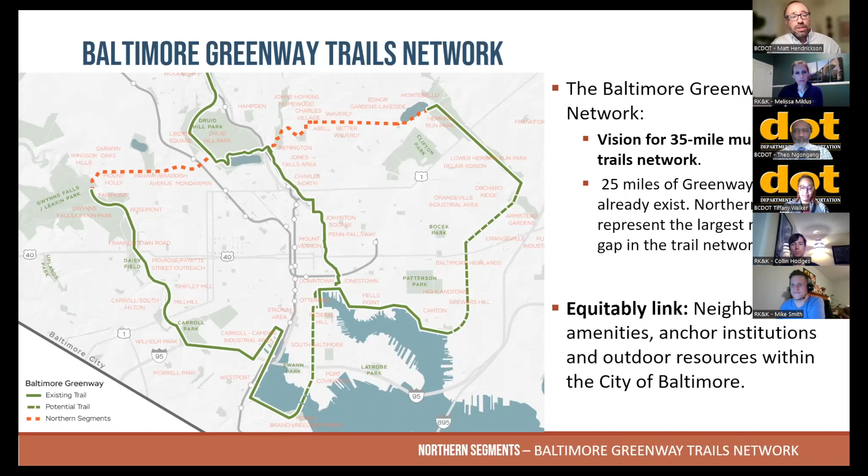So what exactly is a greenway? I think there's just a different feel and type, but if you have experienced any of our trails, whether on Gwynns Falls, Jones Falls, Herring Run, if you've walked around the Inner Harbor, you kind of get that sense of what it really is and what it isn't, right?

We know how important that green space is to folks here in the city. And so it really is kind of a gateway for communities, not just for accessing green space, but then there's the opportunity for us to connect to transit and other modes of transportation, opportunities for other investments and amenities, whether it's benches or playgrounds, or I know that a lot of our parks have ping pong tables. We're kind of activating that with these different amenities.

And again, it really is kind of complementing the neighborhood, a true community asset, as well as all the things that we're trying to do as a city, as far as ADA accessibility, connectivity, access to jobs, and just a cool way to see the city of Baltimore.

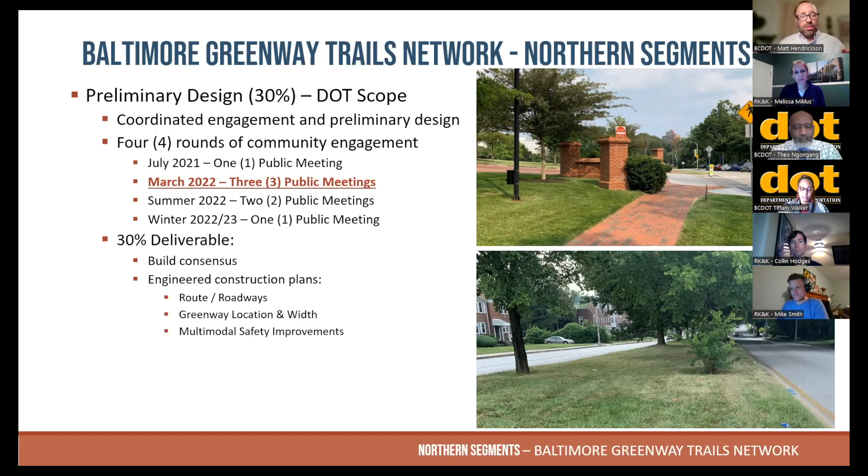So we're going to continue to work on that, you can see the outline there. After this 30% design, we'll go through another design phase to get into more detail around the environmental reviews, the engineering, and further study intersection treatments and signal analysis. That is where we will be for our next steps.

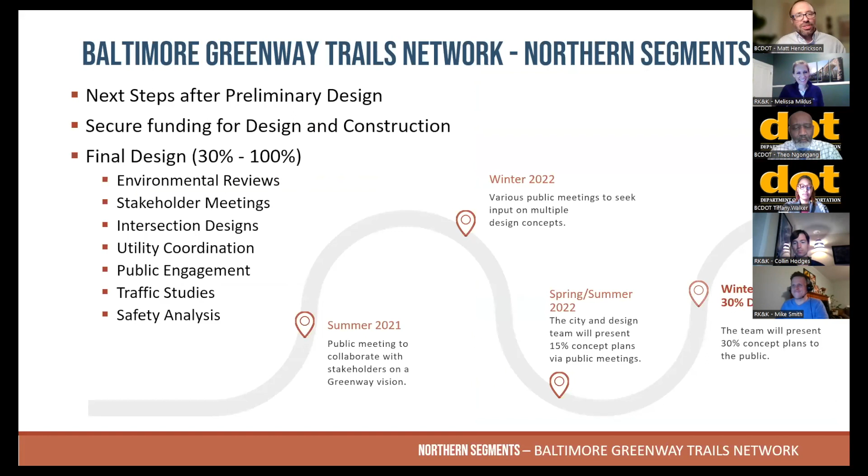So I think I droned on a little bit longer there. Not quite as I should have practiced the last 2 nights. I don't know what happened there. But what else do we have? All right, I am done.

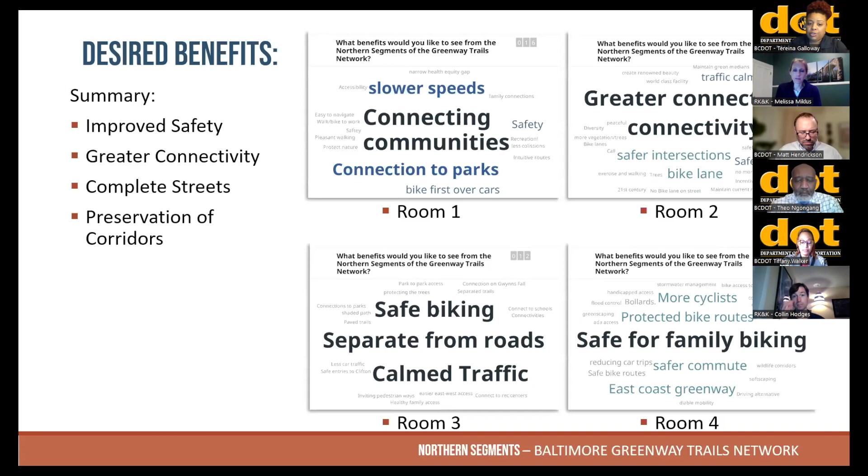We asked the community members that participated about the desired benefits of the trail system, and these are a few of the things that folks commonly said they were interested in. For those on the phone, those things included improved safety, greater connectivity, complete streets, and the preservation of corridors.

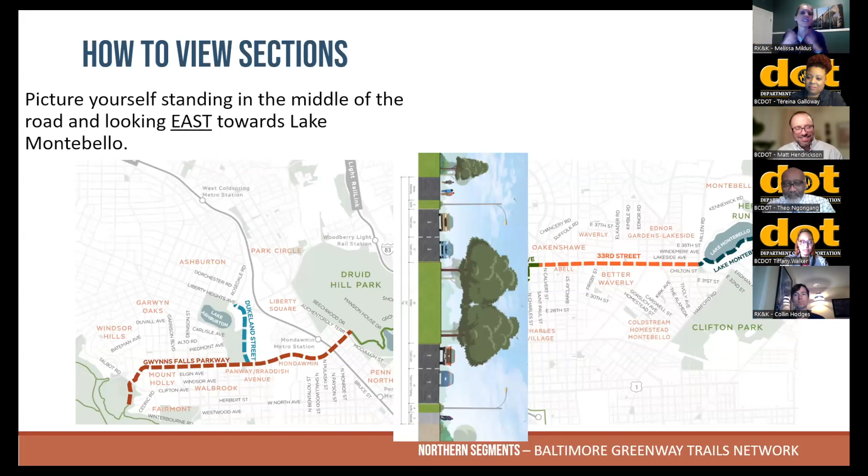Okay, so let's jump into this segment and take a look. In a moment I'm going to bring up a story map, which you can all click on later to scroll through these options. If you didn't join us the past two nights, those options are on there as well, and there are a couple questions about the past two nights on the story map.

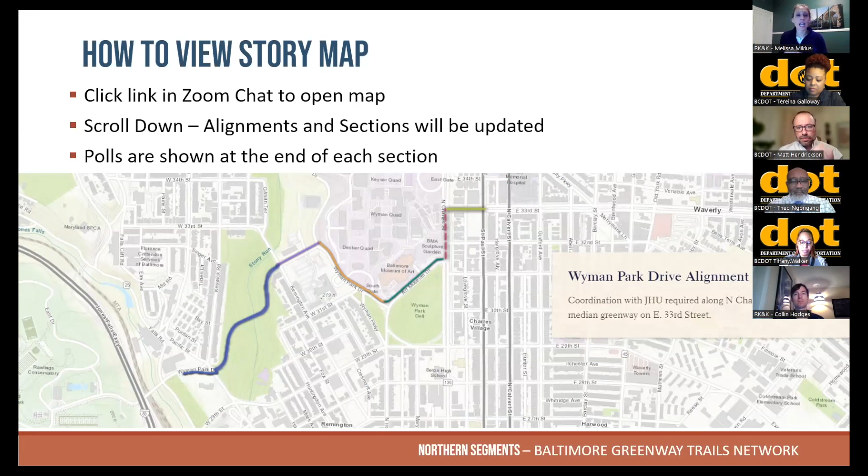Before we go into the breakout rooms, Mike is going to copy and paste that story map link in the chat. But right now I'm just going to get you guys acquainted with it if you haven't seen it before. It's pretty easy, it's just like going to a website. I'm just opening my browser, and you can click on the link or copy and paste it from the chat. Tonight we're talking about the Wyman Park Drive section.

If you click on the link, you'll see the welcome screen here. At the top, I can click through these quick buttons, and it'll take me to the section we're addressing. I'm going to click on Wyman Park Drive because that's our area for tonight, and show you how this works. This is kind of neat.

You can actually click and drag and move your map around, and you can also zoom in and out. So you'll have a plus and minus on your screen as well. You can get as close in as you want to read all the little names of the roadways, or you can zoom way out and see all the sections of your greenway. As we scroll down with our mouse, or as you track down, you'll see different components pop up.

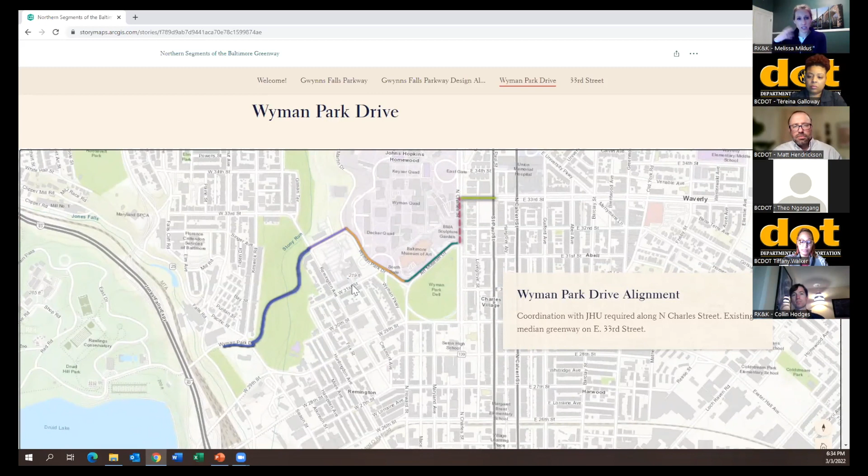So I'll show you how that works for the Wyman Park Drive section. When you go into your breakout rooms and your facilitators are sharing their screen, they'll be scrolling down just like this, or you can do this at your own pace.

We will start tonight with the section of Wyman Park Drive that goes through Wyman Park, taking us from about Sisson to Remington. As you scroll down, these cross sections are going to pop up on the side of your screen, and you simply click one time and it opens up the image for you. So we're looking at this roadway that goes through the park here.

One of the potential design solutions for this roadway is taking that narrow asphalt greenway that cuts through there right now and widening it. In this first option, we widen it away from the roadway, so the roadway remains the same and that path gets a little bit wider. That's our option 1.

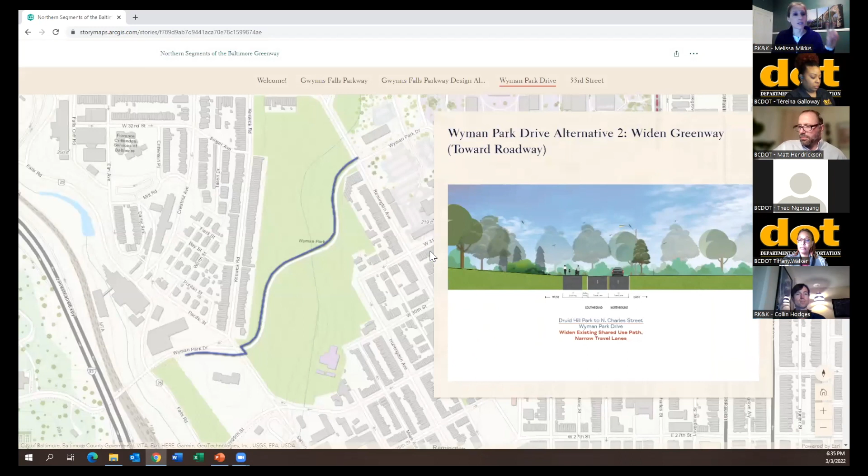As I scroll down, you'll see there is a second option for this section of roadway. What that looks like is we take that shared use path and widen it toward the roadway. In order to have a bit of a buffer between our greenway trail and the roadway, we narrow the roadway a little bit, so we still have a travel lane in either direction, it just gets a bit skinnier. That's option 2.

As I scroll down, you'll get to option 3, which is a little bit different. Again, we're widening that greenway toward the roadway, but in this case we take the roadway to one lane in one direction. Which direction, I don't know yet, because we have to study it and figure out which way makes sense. But the cool thing is that gives us space to add more significant vegetation and a buffer between the trail and the roadway. So you'll have that wide greenway trail, a buffer that hopefully we can put trees in because it'll be nice and wide, and cars moving in one direction. Like I said, I'm not sure which one, we still have to study that, but it's just an idea to get that wide path and some more trees.

As you scroll down later, or as your facilitator scrolls down in your discussions, you'll see a survey. We're not going to answer it right now, I'm going to continue on to the next design solution, but you guys can do that at your own pace, or when we get into the bigger room you can answer that in the Slido with us when we come back. Feel free to discuss first and then come back and answer the questions.

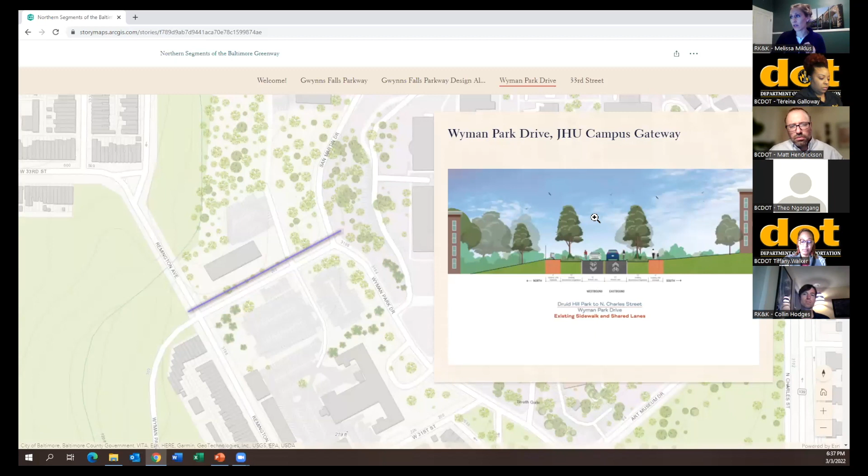The second segment we're looking at is Wyman Park Drive, which pops through the Hopkins Gateway right there. If you guys have been through there lately, it's actually kind of lovely, relatively new, with new brick sidewalks. There are bioretention facilities on either side of the roadway, which means stormwater is going into those facilities instead of into a closed pipe system underground.

This is relatively new, and probably the most different section of our potential greenway trail because it was just completed. At this point, when we have people walking, they'll walk on the sidewalks, and if we have people on bicycles, they'll be in a shared lane environment. This is the only section of our northern segment of trail that isn't just all trail, and it's just because it's new, it was just done. We thought for this little piece we could keep it that way because we have great places for walking and great places for biking. So no questions there, that one stays the same.

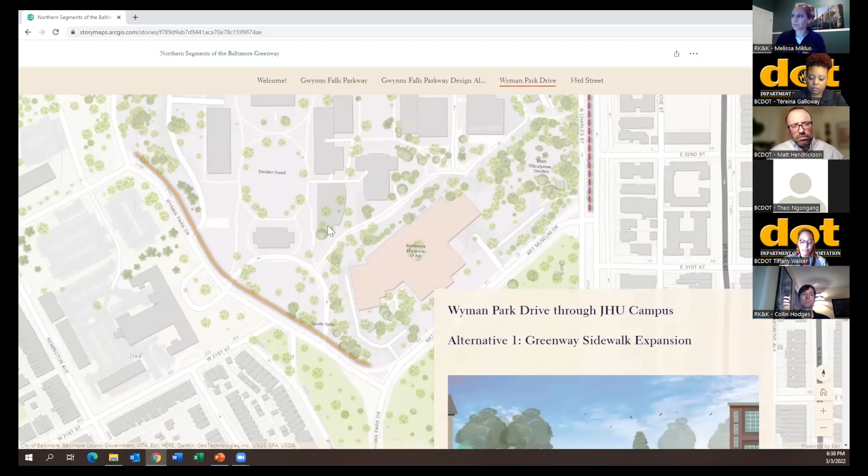So then as we turn the corner and head down Wyman Park Drive, we're kind of within Hopkins campus now, so it definitely has a historic feel to it. There are already existing brick sidewalks there, but since this is a greenway project, a trail project, not a bike lane project, we want to make sure we have that trail experience. We want people to be able to walk and bike in that space.

So here we're looking at a couple different options. The first one is potentially taking the brick sidewalk that is on the north side of the roadway and expanding that to be greenway width. So right now it's just sidewalk width, but we could take that, keep it brick, keep that character within the campus.

Our second option for this section—and we've cut through one piece, and I know the road transitions and changes a little bit, sometimes there's parking on one side, sometimes there's not—but in this particular slice, instead of expanding the sidewalk on the north side, we will have an additional greenway space there. In order to fit that, we've taken some of that parking space on the north side of the street and raised it up to sidewalk level, above street level at that curb height, making our greenway trail there.

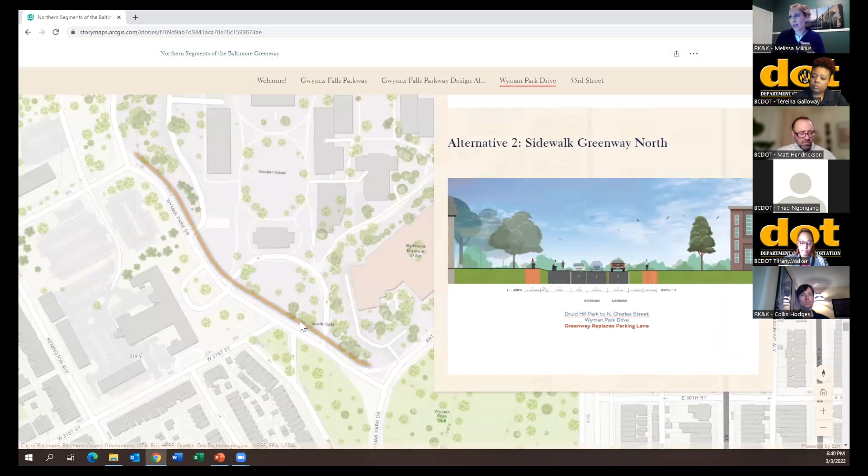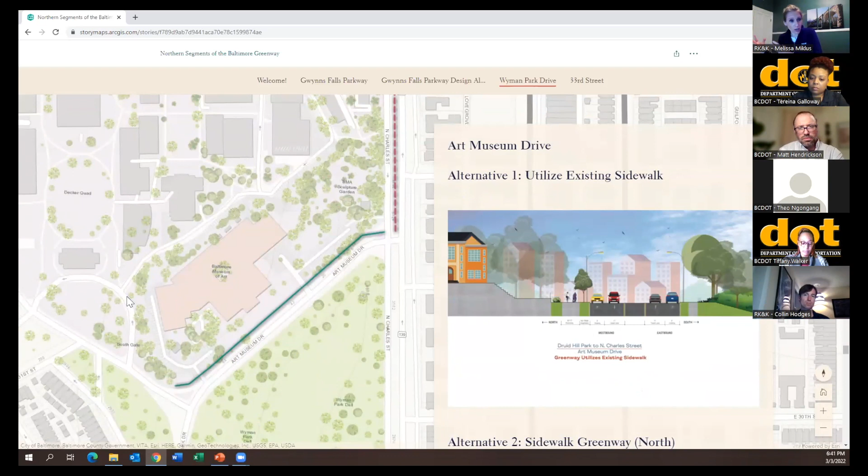All right, let's keep on cruising toward 33rd Street. We get to this section in front of the museum, so we're now on Art Museum Drive. As you all know, we have the museum on one side and a park on the other side of this roadway. Our first option here is to utilize the existing sidewalk. It varies a little bit, and there are some planting areas and some steps in front of the museum, but the first option is to really use that space and use that sidewalk as our trail.

As we keep cruising into alternate 2, the idea here would be to use some of that parking space that's in front of the museum. Again, we pop that up to sidewalk level, so we're completely separated from vehicles moving past. We'll use some of that parking space and then add our greenway there. So that's a pop-up — the first one was the existing sidewalk, and the second one is also on the north side, but using that parking space.

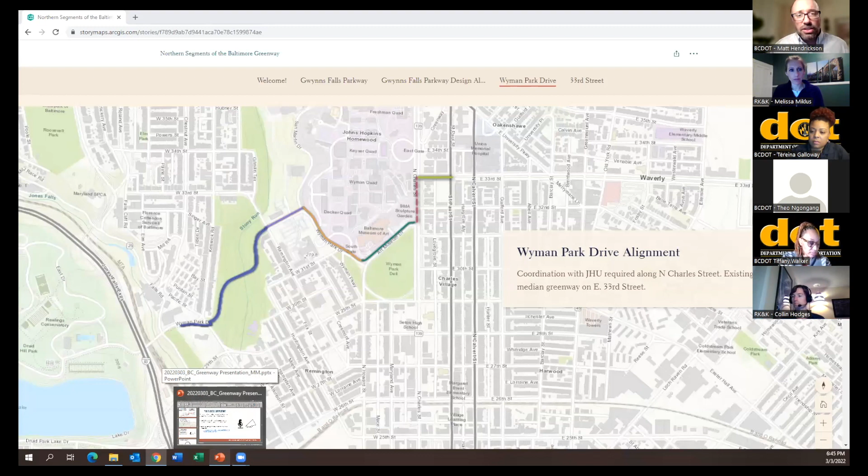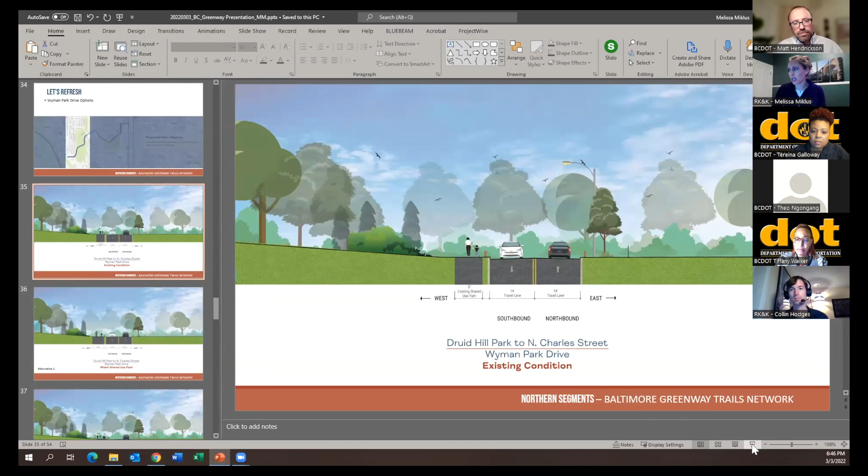Responding to some comments here - someone asked how to make this decision if they don't know what the roadway looks like today, having not been there. When we come back out after you've had some discussions, I have graphics showing what the before looks like. I'll go through the existing conditions so you know what that looks like before we go through the options, so you'll see those before making any decisions in the survey materials. And if we're not giving you enough time tonight, you can answer these questions on the website later, or send an email or leave a voicemail. There's plenty of opportunity to sit back and digest this before making a decision - it's not just tonight.

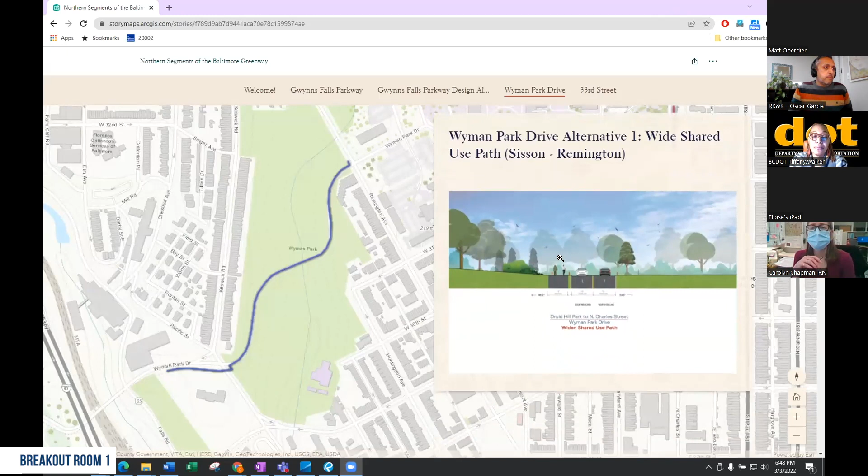For the Wyman Park Drive alternative, one option was expanding the greenway away from the road. Alternative 2 was expanding it towards the road, making the travel lanes narrower. Alternative 3 was taking out one of the travel lanes and expanding the greenway towards the road, providing a wider buffer. So that's for that section.

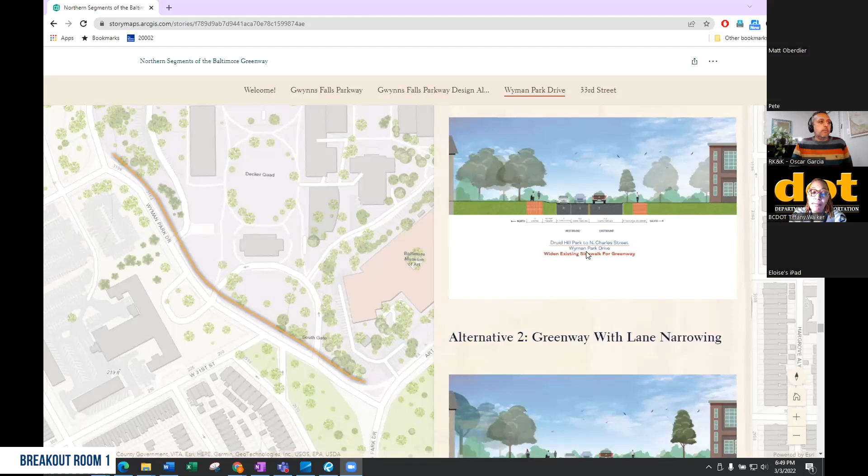For the other section toward the campus, there's the option of using the existing sidewalks, the second option of expanding the sidewalk, and another of expanding the greenway, taking some of the parking lanes. Finally, for Museum Drive, there's the option of utilizing the existing sidewalk, or replacing the parking lanes to accommodate the greenway.

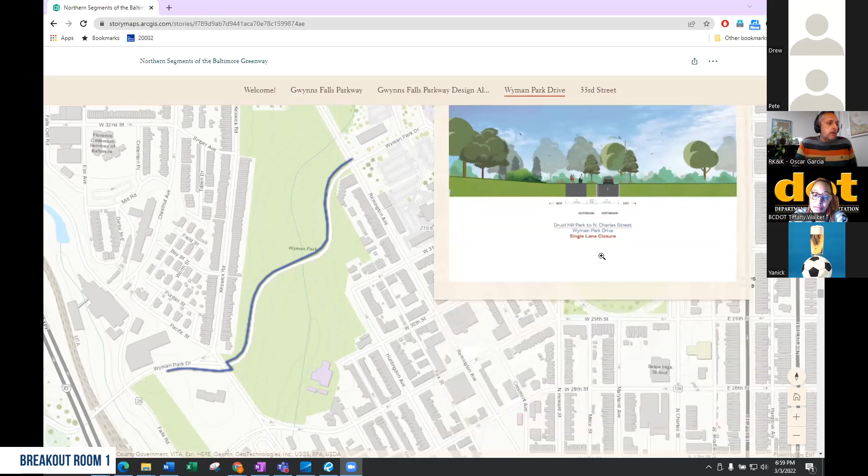Drew and Pete, anything else? I was going to ask, are we going to spend time looking specifically at the other sections, or are we just talking about Wyman Park Drive right now? Tonight's goal is to discuss this section, Wyman Park, the section across campus, and the section across Museum Drive. The other sections, as Melissa mentioned earlier, were covered in the previous meetings Tuesday and Wednesday. I was just referring to the other parts of tonight's meeting, just because the cross sections are so different.

Just generally, I wanted to comment on any of these alignments that are going to be narrowing road space. I ride daily on Art Museum Drive taking my kids to school, and cars fly on that street, and it's next to a park in front of an art museum. That sidewalk gets pretty crowded with people going to and from the museum, especially during events. So anything we can do to narrow that roadway and reallocate that space for the trail, rather than cramming everyone onto a sidewalk, would be my preference. Same for the street leading up to that as well - anything we can do to get it into the existing roadway rather than messing with the sidewalks would be my preference.

I see Nolan, if you want to unmute yourself.

I actually live in Mount Washington, so I don't live in the areas necessarily affected, but I regularly ride my bike on the Jones Falls Trail when going to Penn Station, basically commuting on the various trails. I just generally wanted to support, and I'd get excited by, the completion of the trails. I agree with what everyone is saying regarding reducing travel lanes - that makes a lot of sense. I also agree with the comment about testing it before - other cities have done that, closing to traffic on Sundays or temporarily, to get used to that sort of thing. Anyway, just wanted to show my support.

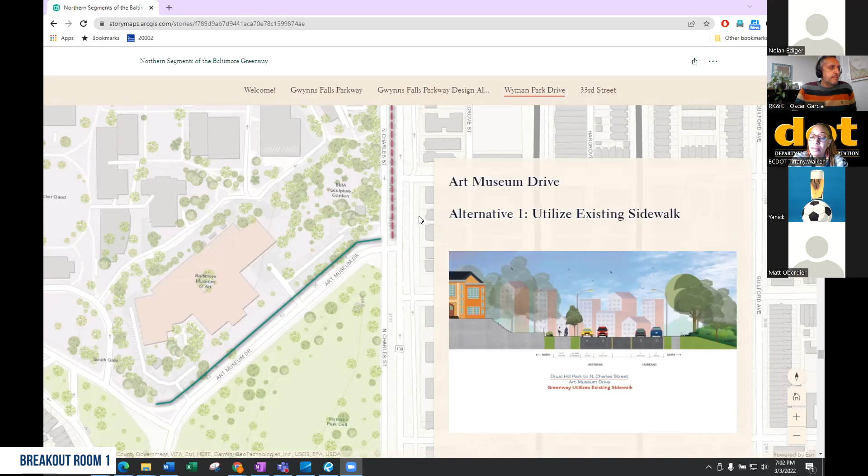One thing that hasn't been discussed is that dashed segment on Charles Street. There are some bike lanes there - is that what is intended to be used, or is there a trail section intended? I think that's still under study, given it's a complex intersection. There have been recent improvements, and it's still under study to see how it can be incorporated into the greenway. So there's not a proposed alternative yet - that's still being developed, which is why it's not being shown or presented.

Okay, if I could, I'll comment on my experience there. I regularly ride on Charles Street past the Hopkins Homewood campus, and there are bike lanes on either side of that street as newly developed, but I won't use them. On the east side there's an entire parking lane across a large green median, and a travel lane for the parked cars there. I use that because traffic is so much calmer, wider, and more safe. On the main road, they put parking outside of the bike lane, so on either side I'm challenged by drivers and cars, and I absolutely do not like that. I have no idea why it was designed to put the bike lanes in the higher traffic area rather than down the parking strip, and I would recommend that ultimately be changed. That doesn't require curb reconfiguration, just some paint and adjustments to how the parking is done.

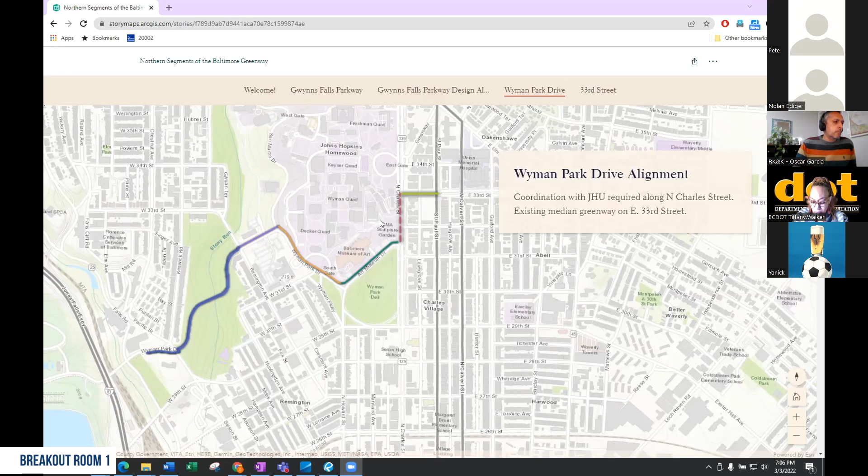But what you're using now, is that an actual parking lane? Yeah, so it's a completely separate roadway from Charles Street itself, parallel to it, separated by a green median maybe 6 feet wide. The parking is for in front of the residence buildings there, but it's just wide enough to get parked cars and have a travel lane for them to move in and out.

It's not a throughway, so there's no through traffic there. As a biker, the only competition I have for the road space is cars that would be in or out just to park. That feels much more comfortable, and that's what I choose to use all the way up to University Parkway. I'm making a note of it, but also, as Oscar shared, send Matt an email.

Yeah, I'll include all these comments electronically as well.

Okay, we have 5 more minutes.

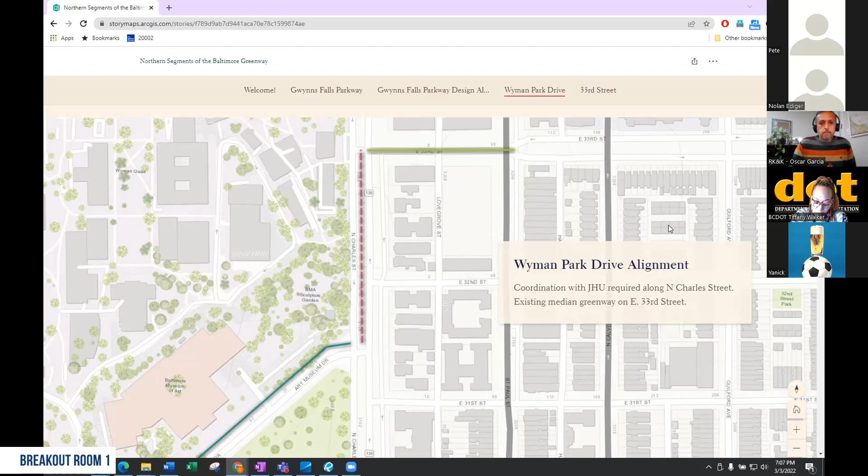If I could just echo the previous caller's comments, the temporary closure they've done on the southbound lane for that student center redevelopment has made that road exactly what it should have been from the get-go when Hopkins did that work a few years ago. I would love to see a permanent closure on that southbound lane, so you don't have southbound traffic on Charles Street anymore. That whole strip has gotten infinitely better to ride on.

Sorry, my hand was raised as well, but I want to agree with the two of you. I find it very odd that you have a traffic lane whose only purpose is to simply serve cars parking, a travel lane for parking cars, whereas you could put the parking on the main part of the road and use the entirety of that area in front of the residences for a bike path. I agree it would be much safer.

Anyway, so that's, agree with you both. But the temporary lane closure is great as well. I regularly ride on that, and it's much nicer having fewer cars to fight with, for sure. Anyway, that's it.

But if you did that, how would it impede the traffic for drivers? I mean, it's closed now, and I haven't seen a whole lot of change there.

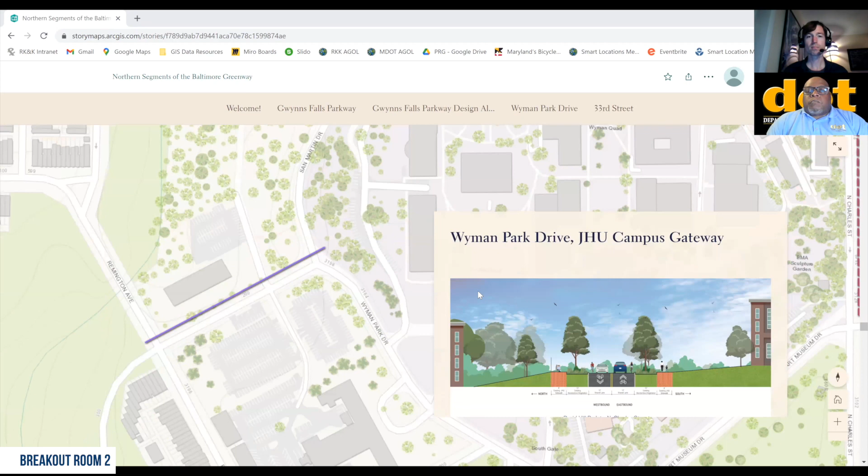So one of the options has the sidewalks only being extended, and I know that ADA accessibility is a big part of the Greenway expansion, and I was just wondering how the brick sidewalks are considered in terms of their accessibility to people using mobility devices, because I currently live in Bolton Hill and they can get a bit hairy when it's icy, and definitely if vegetation roots grow through them, they can get a bit wobbly, and then people are forced to use the actual streets for that reason.

Okay, no, that's a good question. So you're kind of concerned about the material and how in certain conditions, especially, it could get dicey for those who are using mobility aids, or even bikes potentially, or people who can't get around as well. Does that sound about right?

Yeah. Okay, great. So, but also what I wanted to note, I didn't know this before, is when we get back into the main room, we're going to have a bit of a recap from each group.

So I'll mention some of the main points that were discussed, and one of them I'll certainly bring up is the question about the brick sidewalks, and also generally the materials being used for the trail, what we're considering there, and making sure we are fully considering the impact that different materials would have on people with different mobility needs.

Thank you, John, that was a good comment. To answer your question, I'm not sure personally, we'll have to run that by the group, but we'll generally discuss the materials being used. I'm not aware of any specific limitations to brick when it comes to ADA compliance, but different materials, of course, have different properties and different conditions.

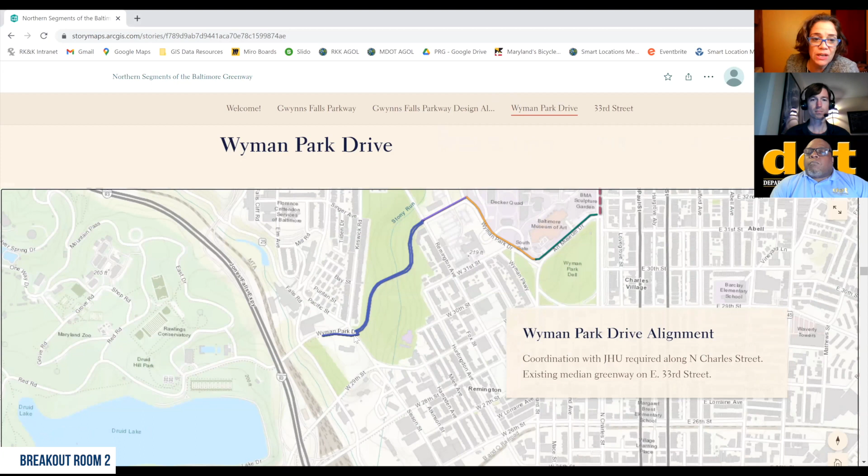One is, I was hoping to see something about the intersection of Wyman Park Drive and Sisson-Keswick, because that intersection is a total and complete mess. We have to do something about it if the safety from Druid Hill Park to this part is going to be there. I'm a runner, so just like yesterday, I live in Charles Village and I go to Lake Montebello, but I also go to Druid Hill Park, and that intersection is pretty treacherous. I do want to see something about that particular intersection, because the way it's configured now is totally not safe. There's no crosswalks. The slip lane has to be closed. So I want to make sure this is being considered in this plan.

Great, thank you for the comment. So it looks like you're talking about this intersection, and actually I am a runner also, and I have gone through this intersection, and I completely agree. It's a little tricky, as you said. Doesn't have great accommodations currently.

So in terms of the question about how it's going to be addressed, I'm not sure exactly what stage or what the design concept might be for that intersection yet, but I know that intersections throughout the corridor are going to be strongly considered and carefully formulated so that they work well for all the users anticipated on the trail. We won't just begin and end a trail on either side of an intersection and leave it untouched and not conducive to the modes that need to use it.

So this is considered in the 30% design, that intersection is included in that. I'm almost certain that is. I'll bring that up in the main room and just make sure. But yes, intersections will be considered. I'm 99% sure about that.

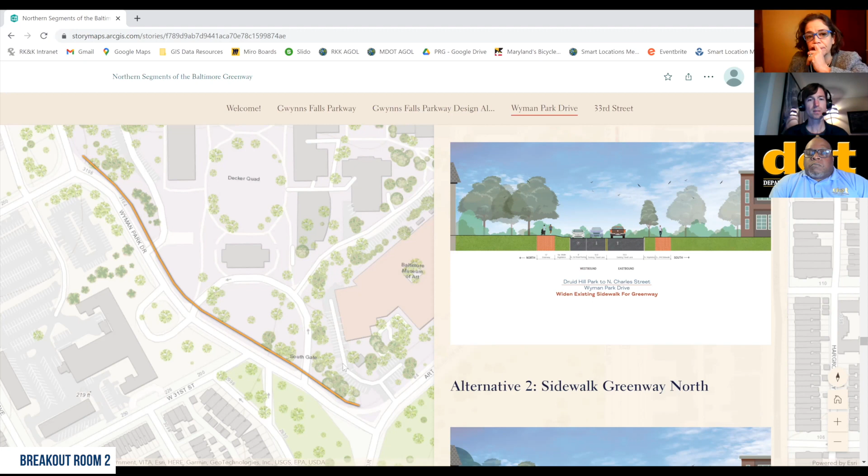I see, oh, so that is one of the options. You're talking about this stretch here, right, along the campus? Yeah, not by the daycare center, but over, as you're going to Art Museum Drive. Yes, okay, so this stretch here, right, you're probably referring to this very large or very wide lane in traffic here, which is about 19.5 feet. This is the one you're talking about.

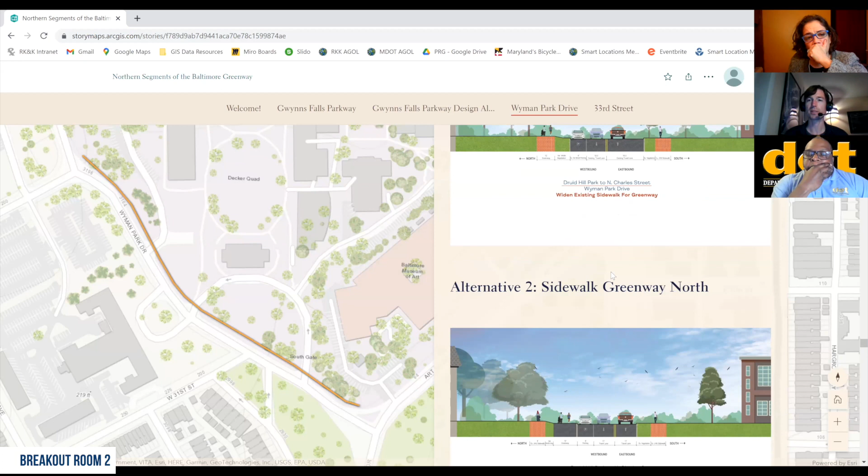Yeah, mm-hmm, yes, okay, so that is one of the alternatives. When we're looking at the 30% level, it's just making sure that we consider all the options that could be implemented or feasible to make the connection work, not necessarily preferring one over the other at this point. So that is one option, to keep the lane as is in case that was desired.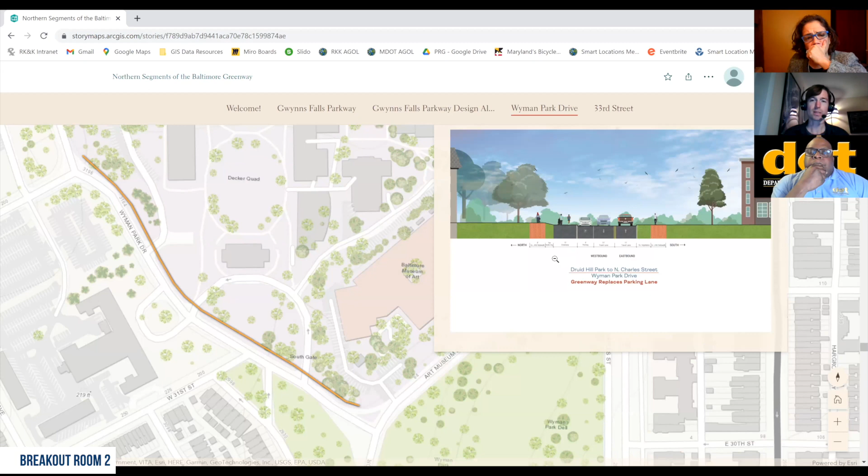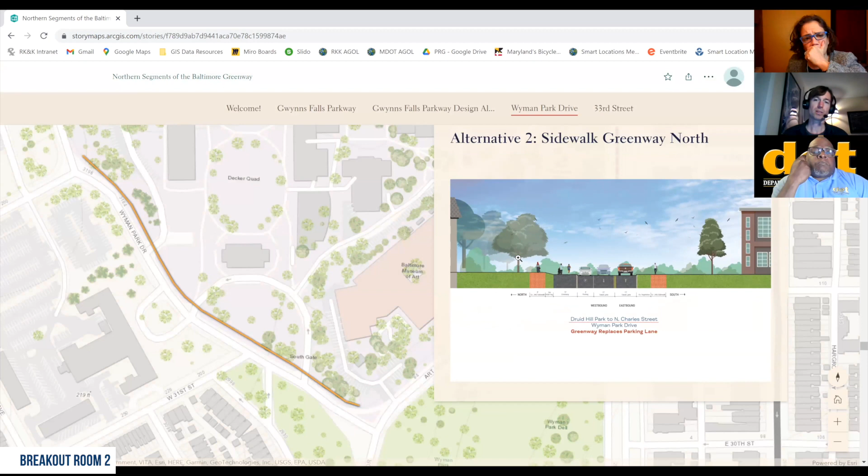But there is another option, as you mentioned, to bring the greenway into the road—kind of elevate it, not into the road, but have it road adjacent and elevate it so that it's separate, and reduce the size of that lane. So that is one of the options we have available here. And it's sounding like you would have a strong preference for that over retaining the roadway as is.

I was just curious about that. I think the roadway is pretty big. But I'm looking forward to hearing the rest of the views of everyone.

I also know that that's actually Hopkins property, and so that's another factor in whether or not those conversations have actually happened. I need to be part of those conversations.

Okay, and I'll bring that back to the project team to involve you or reach out to you in those conversations. And Eric, would you mind communicating that with BCDOT in case they don't already have that on the agenda? Okay, thank you so much, I really appreciate the opportunity.

I want to give time for everybody else too. Sure, thank you. And Colin, real quick before you go to the next person, John also agreed that the slip lane is not needed. I guess that's in reference to the Keswick Sisson area.

Okay, and Tanya, Phil Hicks says existing brick walkways are not maintained currently. So that's something else to note - materials, and also the need to maintain them, in terms of what is installed in the end.

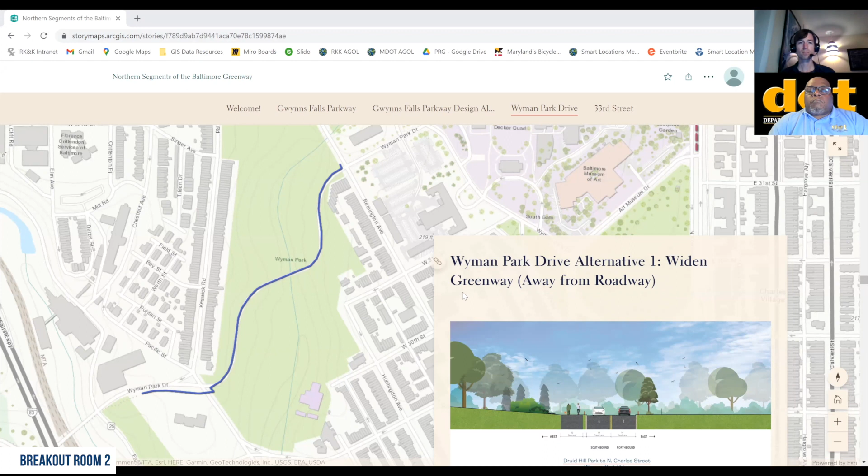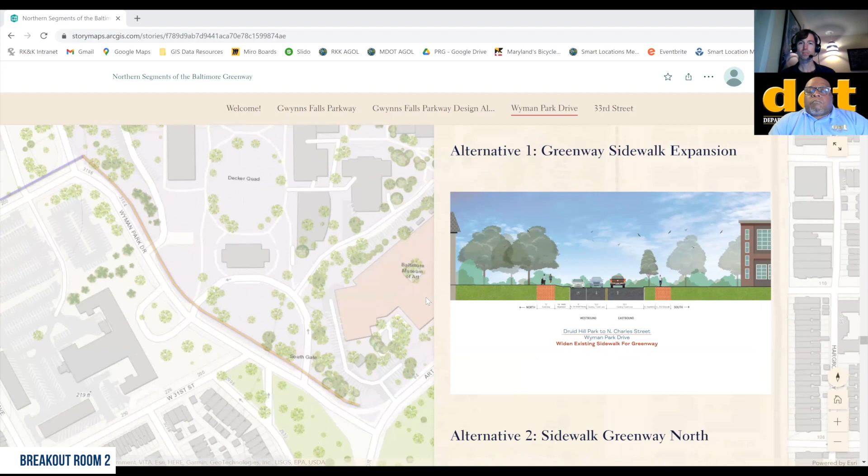And when we move into the Hopkins segment, I also know the community has had meetings with Hopkins and the first version of this project team, where they said we could not use the sidewalks for the trail and it needed to be in the street. So seeing that presented as an option when it's already been vetoed by the property owner seems like an oversight. We would just need to keep the facility as a sidewalk extension into the street, which I think is also a better facility.

And then in front of the art museum, I support widening the facility out into the street, but I think parking there is also important. It would make sense to take the center turn lane instead of the parking lane. There's at least 12 feet of buffer there in the middle of the road. I don't know why we wouldn't utilize that space for a travel lane, use the existing travel lane for parking, and extend the trail out into the road. That way everyone wins.

And then as it wraps the corner, I'd encourage the team to study how the existing construction closure is affecting traffic, because it doesn't seem to be, and it might be a good time to reclaim all of that space for the trail — the red dotted line here, which is already closed to vehicular traffic during the closure for the Mattin Center, the Student Center redevelopment.

The only other thing I'd echo is that the crossings are all very dangerous, and especially the one at Keswick needs to be immediately addressed, even prior to project implementation, with a quick build or something.

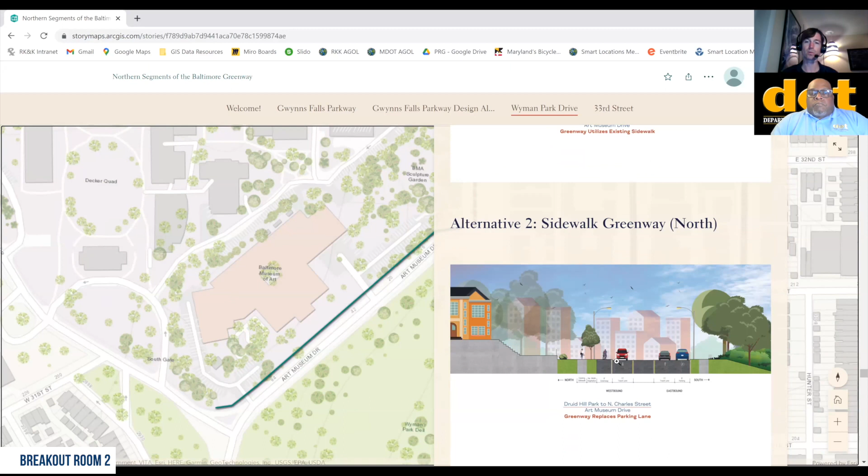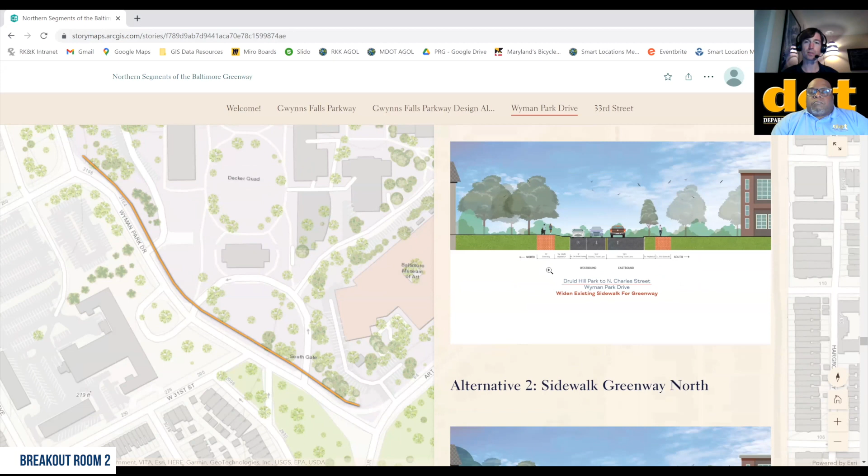Just to recap a little bit: on Charles Street, there's already a lane closure in effect that doesn't appear, from what you've witnessed, to be affecting traffic, and that could maybe be discussed with JHU. At the art museum, taking potentially the center turn lane to use that space to bring the separated greenway out into the roadway could be an option. There had been previous discussions where JHU may not have been as amenable to the greenway being on a sidewalk, so we should make sure we have everything straight with that, and what you prefer.

It sounds like the alternative is the sidewalk greenway, or the greenway extending into the roadway and elevating to separate. And then there was an alternative before through Wyman Park, where the entire roadway would have been closed, and that's no longer presented — that's something you'd want to see brought up again. Thank you very much for all of that, I've taken some notes.

And Eric, is there anything regarding the past engagement efforts, the outreach to JHU, or the alternative where the entire Wyman Park Drive was shut through the park, that you're aware of that would help? I do remember meetings in the past referencing Wyman Park, the area Jed's talking about being closed off. I think it was presented in the meeting last night, but wasn't tonight.

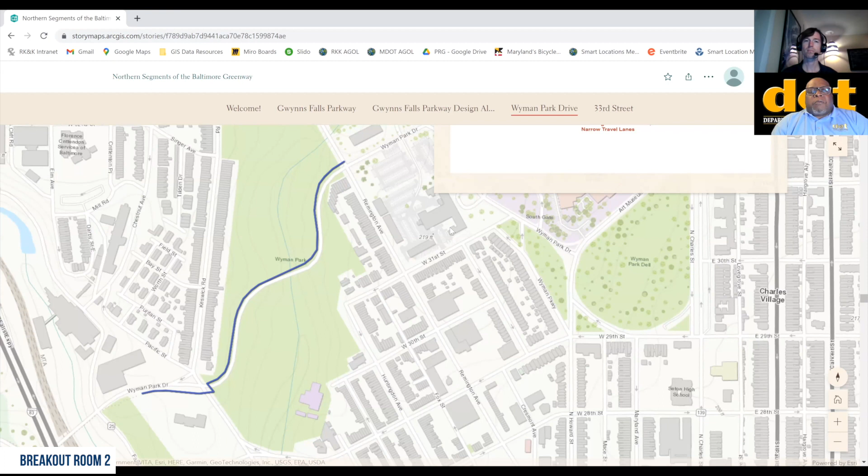Am I correct, Jed? The whole slide deck was available last night, and it was in the slide deck. It wasn't presented, but it was in there, and it was removed overnight. Oh, was that removed? I thought that slide showed the entire road closed, or was it just a lane closure? There had been a full closure slide at one point that was in the deck. Okay, yeah, I'll look into it. We probably have to look into it to see what happened.

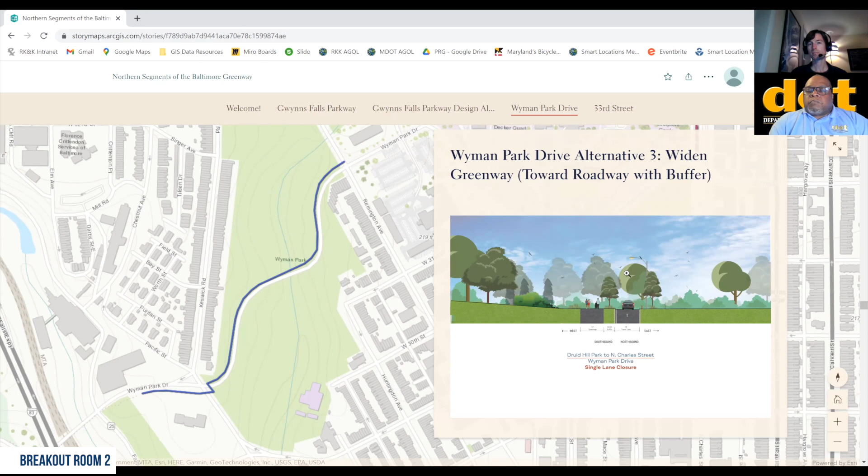I just wanted to make one quick comment. I was here in yesterday's meeting on 33rd Street, and I wanted to wait until the end to talk about Wyman Park Drive. If I had seen that there was an option where it was a complete street closure, I would choose that one out of all the options. But my question is, from yesterday when we were talking about 33rd Street, there was the median option where the Greenway would go down the median. I was looking at the other options for the streets, and I was interested to see that the Gwynns Falls Parkway didn't have that as an option. I was just disappointed to see that. That's all I wanted to say.

Okay, so you're disappointed that the median Greenway was not an alternative for the Gwynns Falls. Yes. Gotcha. Okay. I think as may have been brought up in previous meetings, there had been other outreach efforts in the past where the median-running Greenway was not favorably received for a variety of reasons, and that's part of the reason it was dropped from these alternatives. But I'll bring that feedback back to the group for sure.

So thank you. From our meetings yesterday, it seemed like the median option got the majority of the votes on the 33rd Street option. Yes, you're right, it seemed to be the one that rose to the top for sure.

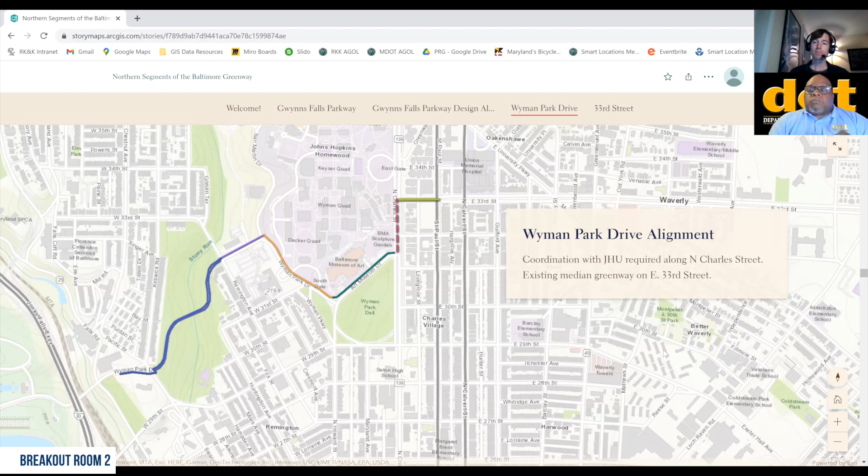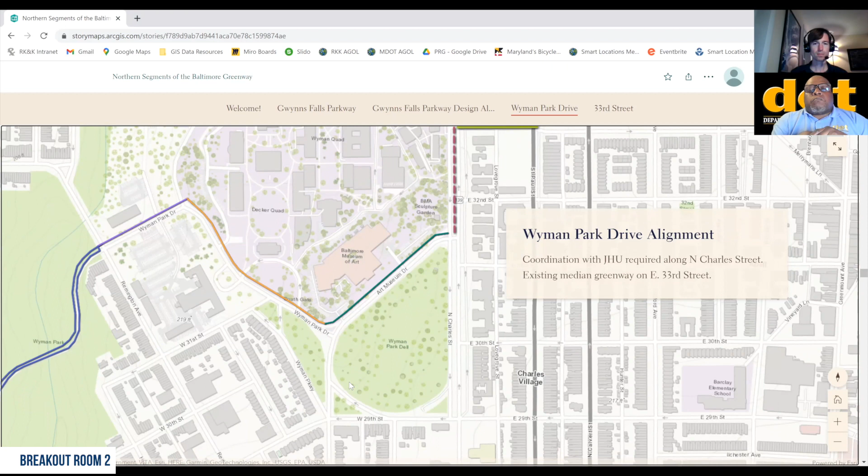Was any thought given to, instead of going in front of the art museum, going around Wyman Park Dell? Because there's a huge lane there where there's already a bike path. And the road from 29th to Charles Street going down to Art Museum Drive is barely used at all, to give you a lot of space and still leave all the parking in front of the museum.

Okay, just to make sure I understand, you're saying that instead of going in front of the art museum, was it ever considered to go south adjacent to Wyman Park Dell and then curve around 29th Street and go north on Charles from there? Right, because there's a bike lane on Maryland that comes in, they've set it up nice and wide there. So going around that circle and coming down again.

No, it's an excellent point. I'll bring that up. I'm personally not sure if that was discussed or if it was ruled out for one reason or another, but I'll bring that up and make sure the team's aware of it.

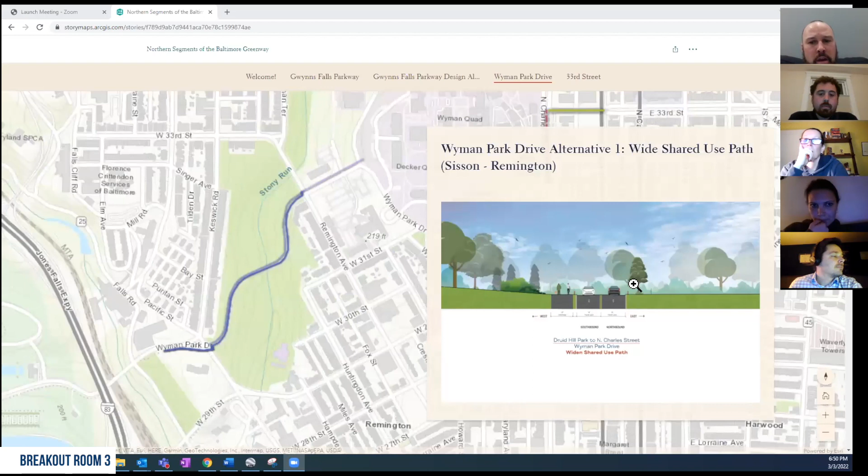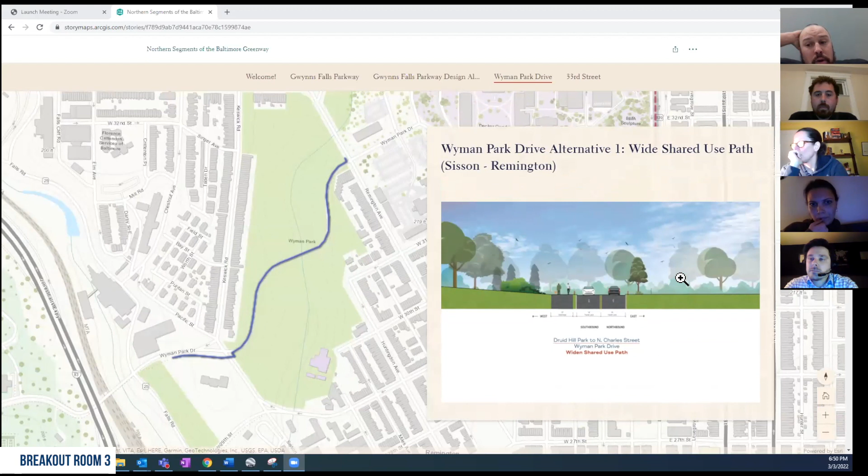Hi, Chris Broughton. I bike this particular area of the proposed Greenway Trail a ton. My first thing I would say is the area through Wyman Park Drive, actually I just biked it last Friday. As a majority cyclist, I cycle more than I drive. I do think that keeping it two-way and narrowing the roadway in each direction would help slow cars down and make it safer for everybody going through there. The idea of one way is cool, but if it's not going to narrow it and keep people from going 40 miles an hour through there, then it doesn't serve a purpose. I'd rather have two-way traffic going 25 miles an hour through there than one way going 35, 40, which is frequent right now.

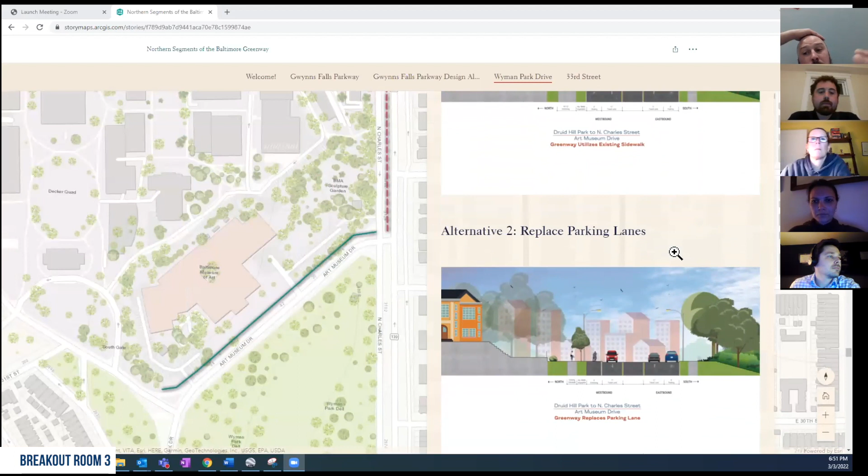Also, I had a question about the Art Museum Drive area because I ride that a lot. My question was if you had considered or looked into putting the trail on the Wyman Park Dell side of the road, and that's a twofold issue—actually three. One, I feel like if it's a greenway it should be up against more parks, and the Dell is a really nice area. Two, when you're coming off of Maryland Avenue cycle track, if you're cycling, you're generally riding up on that side, like if you want to go off to Stony Run or over to Charles Street. So as a cyclist coming from Maryland Avenue, it makes more sense to keep on that side.

The third reason is I could foresee a lot of conflict with museum goers or people going to Gertrude's on the museum side if you put the Greenway Trail on that side. So I wasn't sure why you guys eliminated the south side and didn't give us that option.

Thanks, Chris, for your questions and comments. On the Wyman Park section, there's certainly a lot of benefits to doing the one-way approach, in addition to what we call a road diet, narrowing those lanes, which would hopefully add safer conditions along the Greenway. People tend to feel more comfortable when there's lower speeds, and tighter lanes typically lead to lower speeds. The other benefit is that we're able to plant a buffer in between, since that gives us enough space to do that.

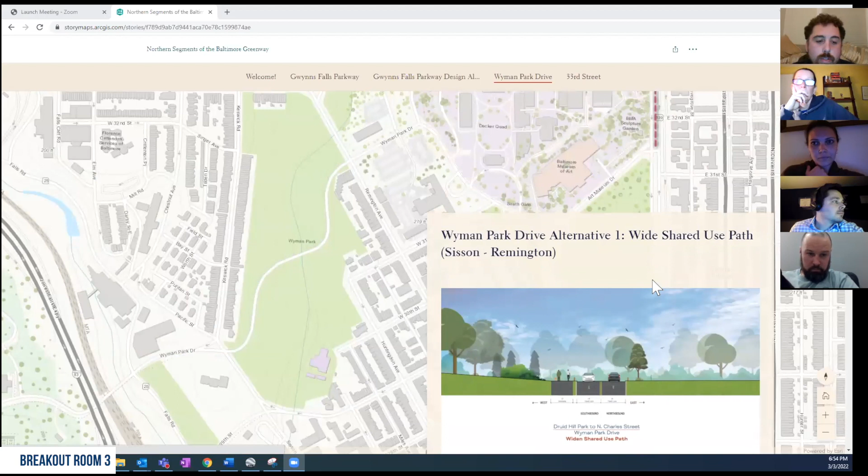I've been trying to work with our council person in the city to at least get a crosswalk that connects the terminus of the existing trail to Druid Hill Park, because right now there are no facilities at all. Folks are forced to either walk in the middle of the road, or there's a billy goat trail developed by the Stieff Silver building. It's dangerous and demoralizing for folks to have to traipse through a lawn or navigate traffic to get to the biggest park in the city, especially when they're about to open the new pool this summer.

So even as we're looking at this longer-term stuff, which is very exciting, I hope the city can do something in the short term to make it safer for folks to get to Druid Hill, because right now I'm not the only parent with a stroller taking their life in their hands to go to the park every day. I'm not sure why it's taken so long to get to this point, because we have a survey with over 1,000 people who signed, going all the way back to last year.

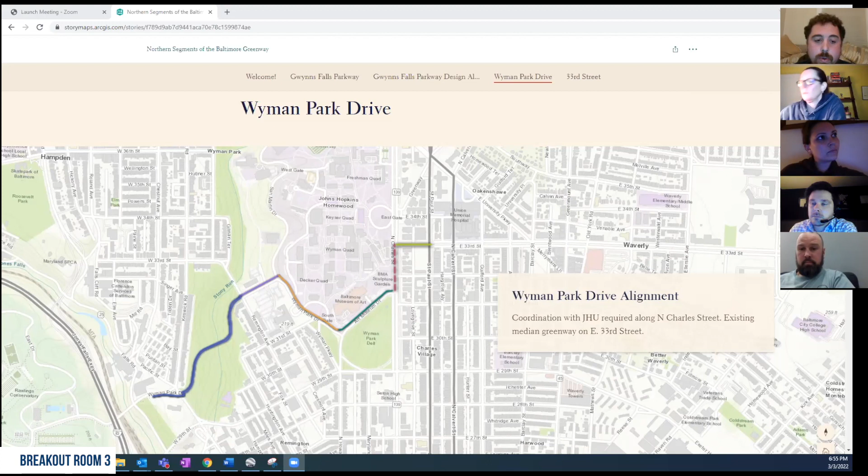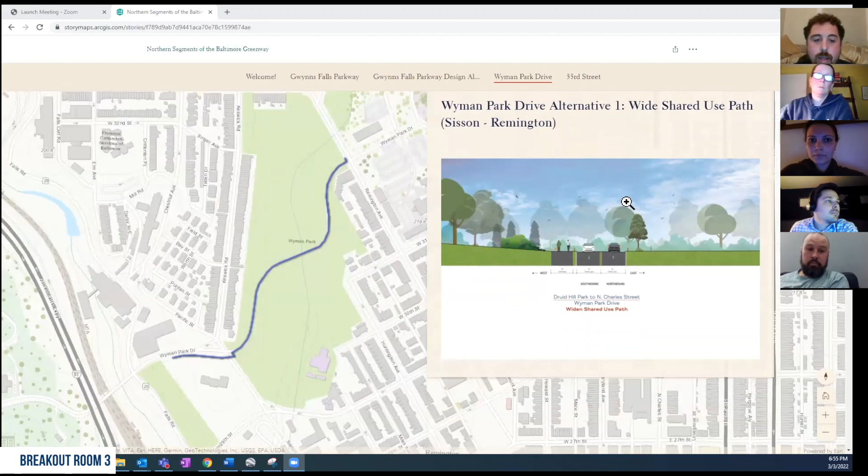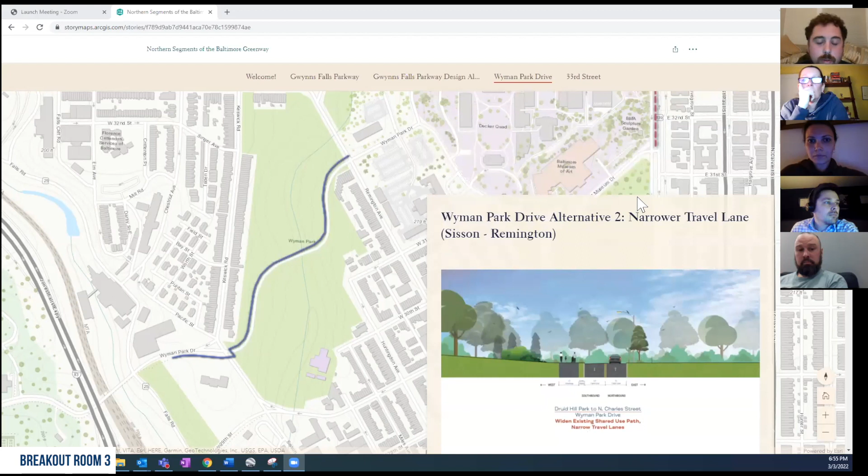The other point I wanted to make is I'm really disappointed that the option to close down that section of Wyman Park Drive to traffic was removed from the public survey. I took the survey earlier and selected that option as my preferred alternative, because it would create a brand new, wonderful park space for the whole community where there's no concerns about speeding cars. I know it's the preferred option for the Greater Remington Improvement Association and a number of other groups in the area, and the fact that it was taken out of the options just before this meeting tonight makes me distrustful of this whole process. I feel like it should be up for public review, and I don't know what happened where it's suddenly gone.

Even if we do narrow the road, I think people who speed like to use this road because the curves are fun to drive fast down. I've seen cars flipped over on this street that I go through every day, and I don't know why we would lose this opportunity to make a beautiful, contiguous park space. I would just like to talk more about why it's no longer an option. Thank you.

Thanks, David. So it's certainly still an option—really, it was just in the terminology. The section we had shown previously showed a temporary barrier, and based on feedback we received the last two nights, what we did was enhance the lane closure to include the buffer and the widened Greenway, and also narrow that lane.

So we don't have a typical graphic that shows that the entire roadway could be shut down. It would certainly involve some additional traffic studies, but I think you're right. I think we want to know if folks want that as an option to completely close off the vehicular access, and what that would look like.

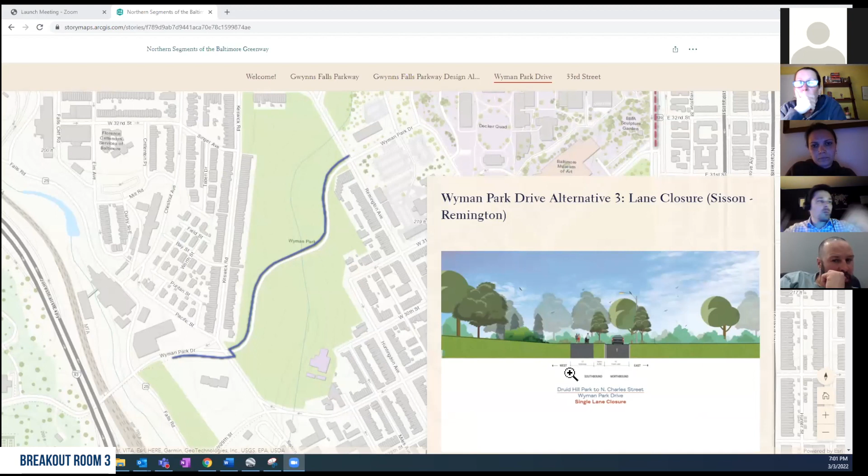So instead of laying additional impervious surface and cutting new paths through, it would keep in character with the brick. We'd be able to use the existing infrastructure, the path system that's already been laid there. It also would connect nicely to the existing shared use path in this section, which currently only exists on the northwest side, so to keep continuity and not have to cross any roads heading into the campus. But certainly this is one of the options we're looking at.

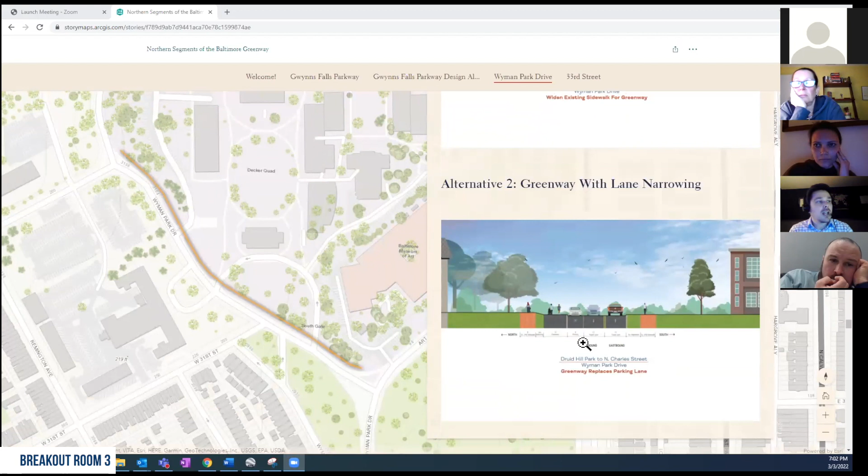The other option is the Greenway replacing that parking lane. The parking lane would shift over, so not going any further into campus, still on that side. It gets tricky when you try to cross people across the road, but if we look into possibly shutting down the roadway section below, that provides a little more freedom to have people cross safely and switch sides of campus if need be.

So I think these are options that are on the table. Certainly not trying to steer anybody one way or the other, but we want to think through what our options are and hear the feedback of what people would prefer, and pursue based upon that.

Like we have been talking with you and working with you, and to be in a meeting right now and be presented with something that you're going to present for a vote, and not have the courtesy to give us a heads up that that's being presented, that's disingenuous to anybody, any stakeholder. So I just want to go on record and say, I'm sorry, I'm just flabbergasted to be in a meeting and see this. That's just my stake. Okay.

Understood, I hear you loud and clear, Jennifer. All right, thank you, Jennifer. And Martha's been patiently waiting with her hand up, so I'm going to get to her next. Thank you.

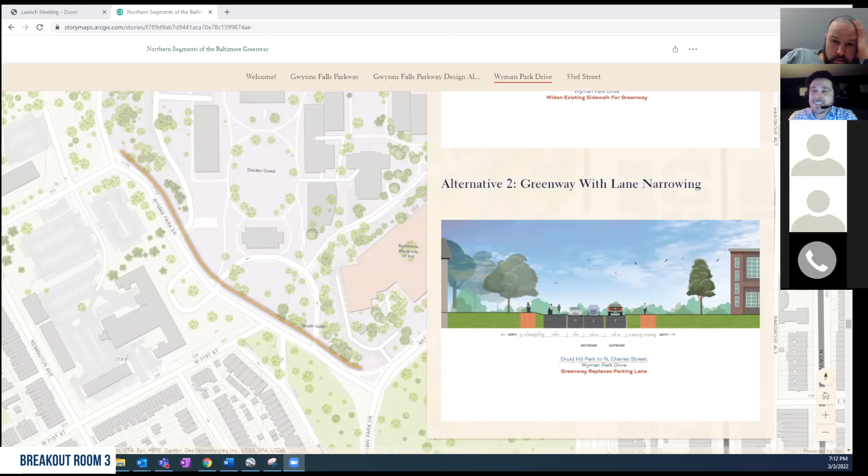Sure. Well, I'll change what I was going to say, but we have over 2,000 miles of roadways in this city, yet less than half of our population actually has a car. Under half of our residents in this...

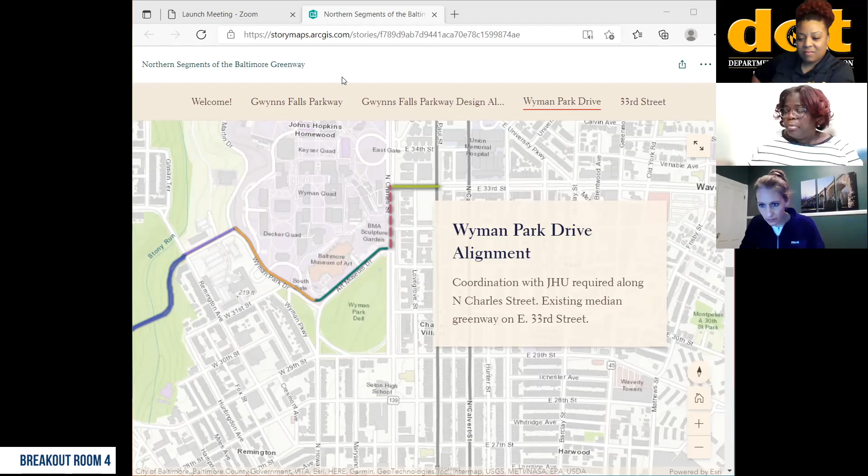Peggy, if you would like to unmute. Yes. Please feel free, yes ma'am. How are you this evening? Fine, thank you. I was on the call Tuesday and yesterday, and I have a couple of really quick questions.

First one is, what do you anticipate the total time to completion to be? So we are still in the early phases of design, and I will ask that question when we get back into the main room. Unless, Tarena, are you aware of what the total timeline is for the project? No, not at this time. We're still very early on, we're nowhere near construction or even a final design. Okay. There's going to be many more touch points before we get to that point.

The second thing, it's been emphasized that this is not a bike trail, that it's a trail for multimodal transportation. But it seems as though automobiles are low priority. And I also want to know who is paying the cost for installation as well as maintenance of these trails.

So I do believe that Theo, Mr. Ngongang, did go over costs and where the funds came from earlier this evening, but we can definitely get that answer for you, Miss Peggy. Well, I don't have it on hand. I'm sorry, he mentioned $1.5 million from the state, as well as $450,000 from bikeways. But when you start talking about installation and maintenance, it's going to be a whole lot more than that. I just want to make sure that as a resident, a homeowner, and a taxpayer, that I'm not going to wind up paying for this. Yes ma'am, we noted your comment, and we will definitely get that information for you.

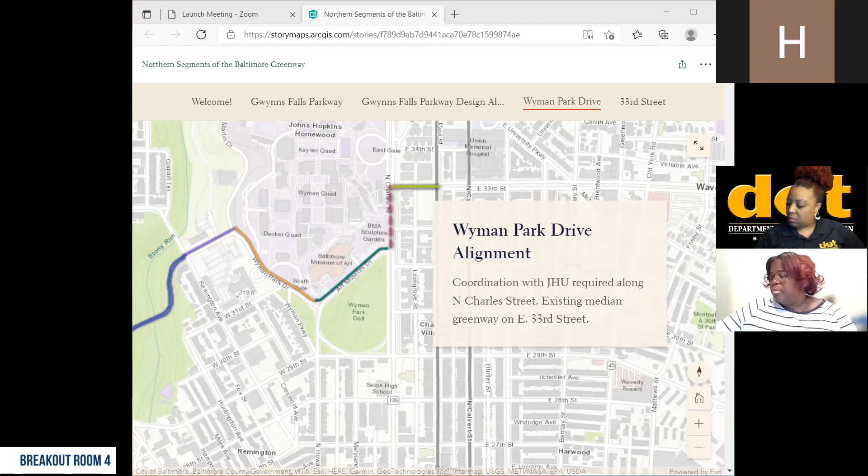Absolutely. So I asked a question to Melissa on Monday, and it dovetails right in with Peggy Rice's question about funding. I really want to have access to the grant request as well as any and all stipulations that accompany the state funding. Grant requests usually come with delineations of timelines and deliverables. So I think that there's a lot more discrete detail associated with this that perhaps can be shared or that is otherwise available. And I, as a taxpayer and resident, along with numerous others, would probably like to benefit from seeing the actual grant write-up and the state funding stipulations accompanying the disbursement of funds.

Yes, ma'am, I'm taking note of that and I'll make sure that gets back to Matt and the team at DOT. I do want to add that I believe he was speaking to the study, just the design, not the actual construction piece. The bikeways money available was to help with creating the design, not for the construction piece. But we'll get more clarity for you for sure.

Thank you so much, Ms. Galloway. Yes, ma'am.

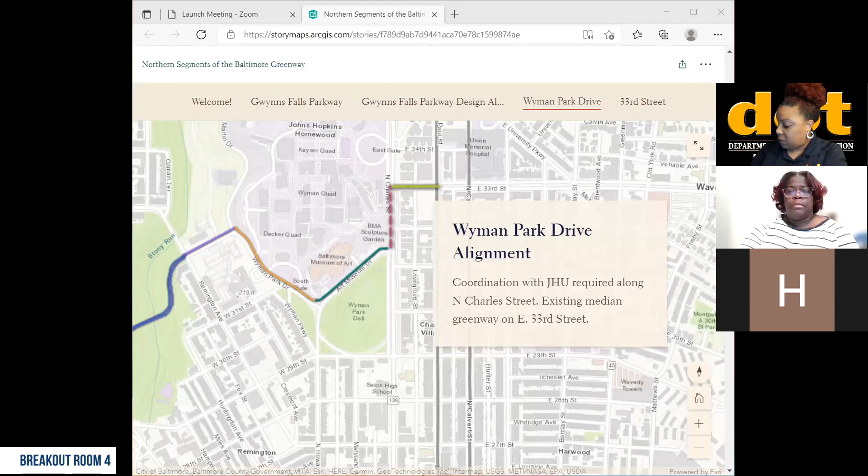Hi, thank you for sharing this. I just wanted to make a comment that with the design choices, I'd really like to prioritize, particularly for this section, increasing that green space. I know for Gwynns Falls and 33rd it's more of a throughway, so I understand the need for wanting to keep cars and parking. But for this area where it's much more green and low traffic, I think prioritizing widening those lanes and maybe minimizing the car traffic—this is a good place to do that, especially if we're not able to do that in those other areas. Thanks.

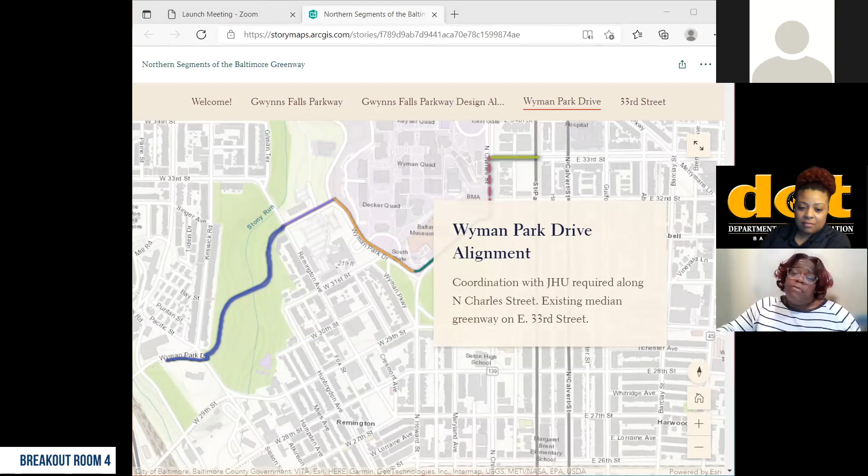Mark Washington, nice to hear from you again this evening. I see your hand. Mr. Washington, if you're talking, you're muted. Hi, Nakia, can you hear me now? I thought his hand just was saying hi. Yes, yes, we can hear you now.

So it's good to see you again. We didn't get an answer to this question last night. Just as there were alternative routes proposed for the portion of the Gwynns Falls Parkway corridor, Olmsted Brothers Boulevard, why weren't there, or why aren't there, alternative routes being proposed for our portion of the Olmsted Brothers Boulevard on 33rd Street coming through Chum? That doesn't seem like we have enough to go on to even discuss a compromise. It's like it's coming down 33rd, that's it. There are no alternate routes being offered for you all to review at Chum. Why is that?

So I do know that even if there are no alternatives suggested, Matt did state that if you have some ideas for alternatives, please let us know what they are. So that's part of the conversation or discussion.

Well, yeah, we did that with DOT. I believe at a meeting that Matt attended over the summer with us. But it doesn't seem as if it were actually taken seriously, heard, or acted upon. So what we will do is once again look to DOT, because they are the professionals, to come to us with proposed alternative routes that circumvent a small portion of the Olmsted Brothers 33rd Street median in Chum.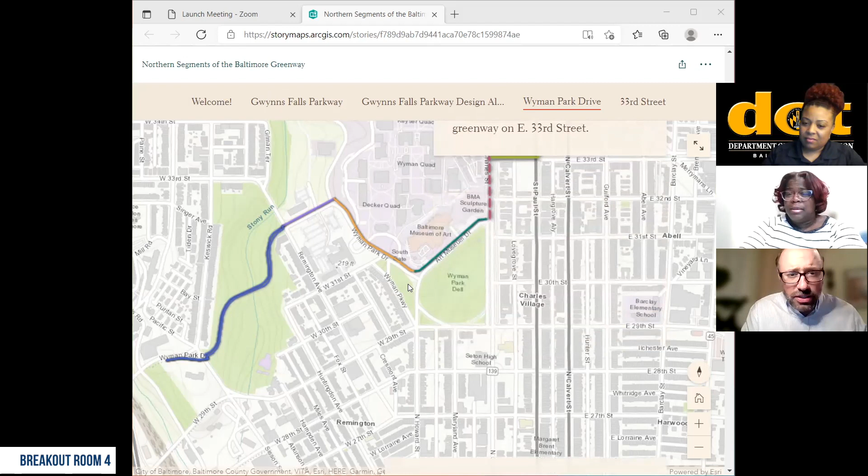If we want to go through those alternatives again, maybe just go through some of the leading questions to get some feedback, if we have a shy group. We're kind of hearing some priorities from the other segments, so well noted. We do want to focus in on this area, but recognize this is a larger corridor. Just thinking about what parts of the alternatives, which alternatives you would prefer.

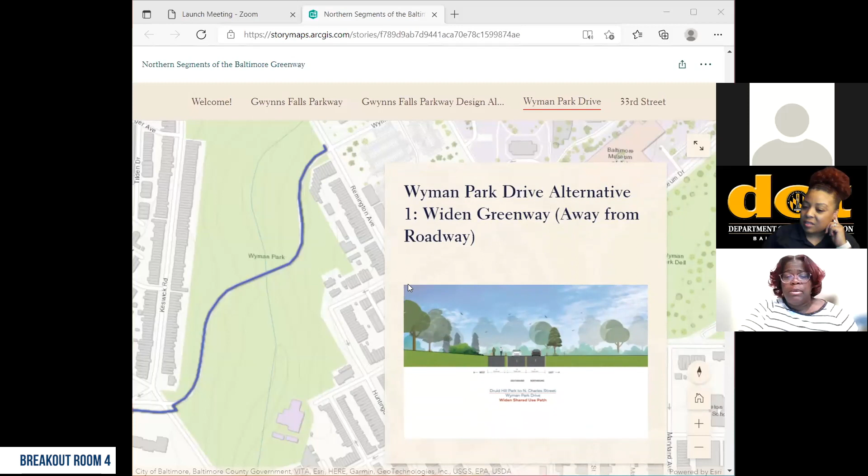Yeah, I guess I'll just chime in again. To go with my earlier point, there's obviously a lot more tension around those other corridors since there's so much more use. So again, my preference here is minimizing it to just one lane of traffic. I think there's a lot more opportunity here to create better spaces for bikers and walkers and people in mobility chairs, and creating much more green space in this area without as much impact on drivers, which in general I think can sometimes be overblown, but particularly here it's a good way to prioritize those green spaces and other options for travel.

Thank you again. So I did share that alternative with everyone so that you could see it's basically having a very wide trail and one lane of traffic with a buffer in between traffic and the walkers and bikers. So we shared that.

Baltimore taxpayer, let's see, Mr. Dick Williams. Hello, if you can hear me, I just wanted to ask about the alternative going down to one lane, in which direction, either north or south. You all have looked at the car count, so I suppose you would find that if one lane is removed so that traffic only goes in one direction, there won't be some sort of huge balloon at one end or the other end of this section as a result of lowering the number of vehicles that can pass through at any one time. Do you get my question?

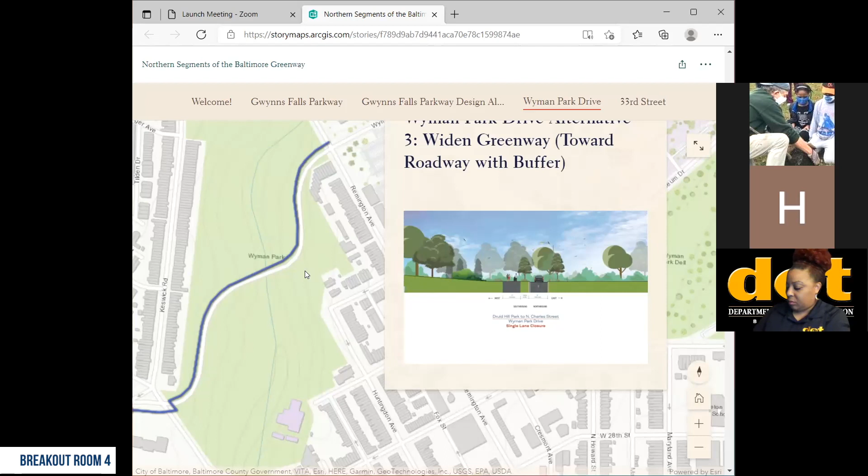Yes, sir. You want to make sure that if we decide to go with this alternative where we take the road down to travel in one direction, that we considered the car counts or traffic volume in the area to make sure we can still handle traffic flow and have that median, in the path that wide. Yes, sir, okay, thanks.

Okay, and I've taken that note, and Serena and I will take that back to the team. Again, we are pretty early in design and still moving through which alternative will work best. Miss Linda.

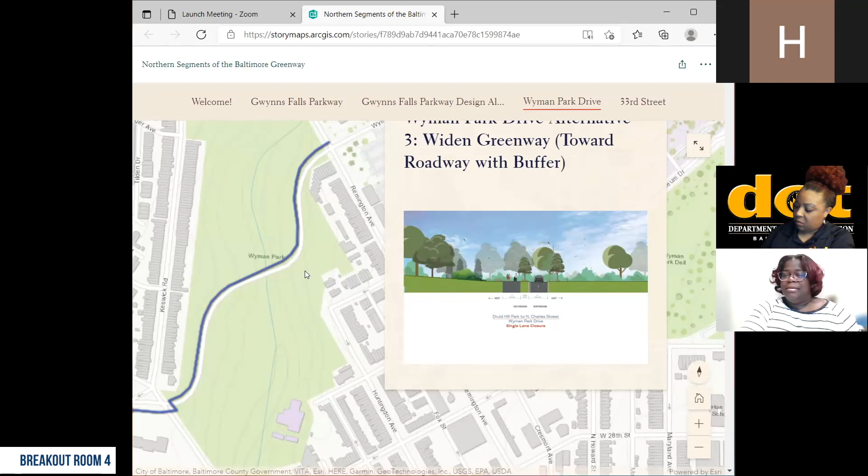Thank you again. The 10 to 12 foot path width, is that the average? Are there ranges for the path width that are lesser than that and greater than that? Because I think folks need to know and understand what the flexibilities are that are associated with this.

And quite frankly, I would also encourage in rolling out these presentations that the parties who are delivering them, who are supposed to be neutral conveyors of information, relax their perspective and viewpoints on whether they think something is cool or not, so as not to prejudice the audience as we go through this process. I heard several comments like that from presenters at the beginning of this, and I find that a little troubling.

I share Mr. Washington's concerns, and I'd like to know what cultural studies there have been with respect to those residents who live on historically protected Olmsted pathway parkways, to ensure their interests are maintained and preserved. Have there been any specific cultural studies, just like transportation studies and environmental impact studies, that address what those stakeholders who live on the streets - not those who pass through on their bikes or cars, but those most directly affected by the change - are interested in seeing, want, and feel should be preserved? That's it for me.

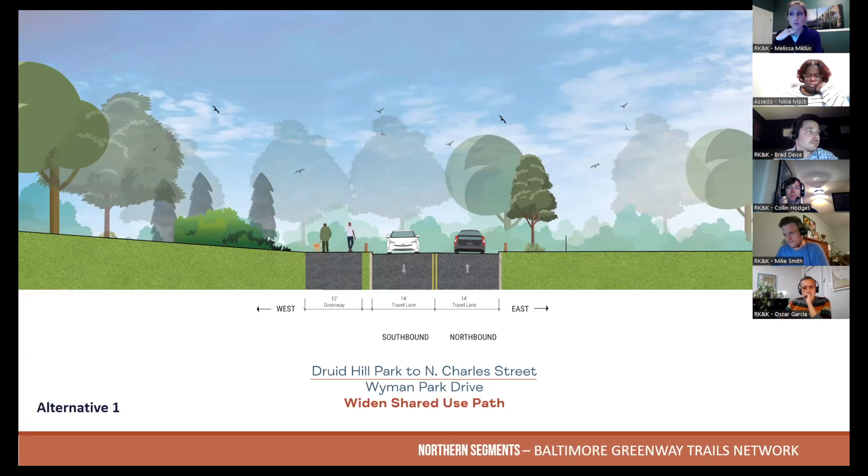So your option 1, when the Slido pops up, is going to be to expand and widen that shared use path away from the roadway. Your option 2 is to expand that shared use path toward the roadway, which will narrow the roadway a bit and then keep the 2 travel lanes.

Your option 3 is to expand that greenway, that shared use path toward the roadway, create a buffer, perhaps with vegetation, trees, etc., and then have circulation by vehicles in one direction. We're not sure which direction that would be.

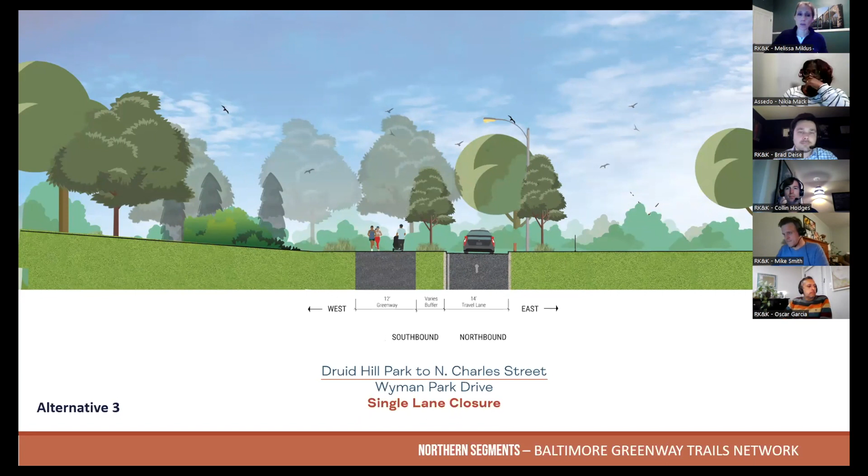So tonight, just taking your temperature on those options, and if there's something that you're thinking of that's not here, not a problem. Again, voicemail, email, contact form, all of those are available to you.

So it looks like option 3 is taking the lead here at 55% of the votes, followed by widening that greenway away from the roadway, low 20%. Widening the greenway toward the roadway with the buffers is now about 58%, 59%.

And it seems like from the discussion that maybe just converting that all to path and closing it might be an option for some of you. So please don't forget to go ahead and send us a message if that is your preference. All right, I'm going to keep cruising here.

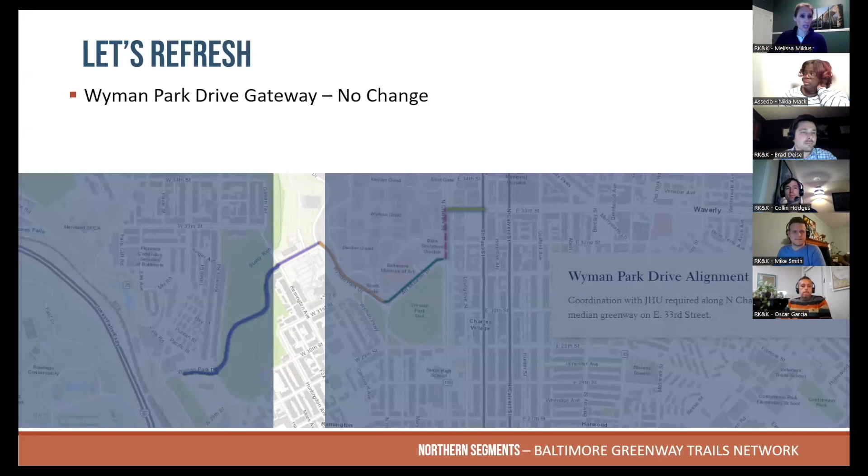So let's do Wyman Park Drive, that gateway. Again, as a reminder, that is going to remain the same. That's what the cross section looks like today.

And then our next section through campus, and we have been coordinating with campus. We definitely need to chat with them some more, but let's hear what you guys have to think about this section. So right now we have a couple travel lanes. One is quite wide. The other one has some parking adjacent to it. And there are brick sidewalks on both sides of the roadway.

So our option 1 is to expand that existing brick sidewalk that is on the north side of the roadway to create our Greenway Trail. So that is option 1.

And our option 2 is going to replace that parking lane, raise that roadway up to sidewalk level so that we have our trail there, and then shift the roadway over. So in some cases, we'll be able to keep that parking. In some cases, it may be a little bit narrow. So that's our option 2.

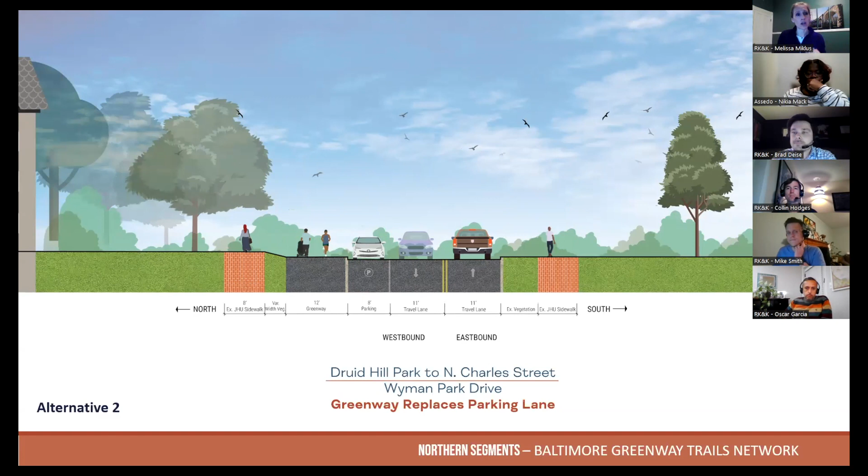All right, let's see what you guys think. Again, feel free to send messages to us, contact forms, let us know what we didn't think of there.

Really good feedback from you guys. We'll definitely be coordinating with Hopkins, they're doing a lot of work over there. We've had a couple meetings with them already talking about their campus master plan. Good to know what you guys are thinking tonight and over the next month so we can incorporate that into our discussions. About 79-80% likes that sidewalk greenway on the north side, and about 20% likes the sidewalk expansion. All right, let's keep going.

Okay, let's look at Art Museum Drive. Our existing condition out there today is there is an existing sidewalk in front of the museum. We have two-way travel on that roadway, parking on both sides of the street, and that buffer in the middle.

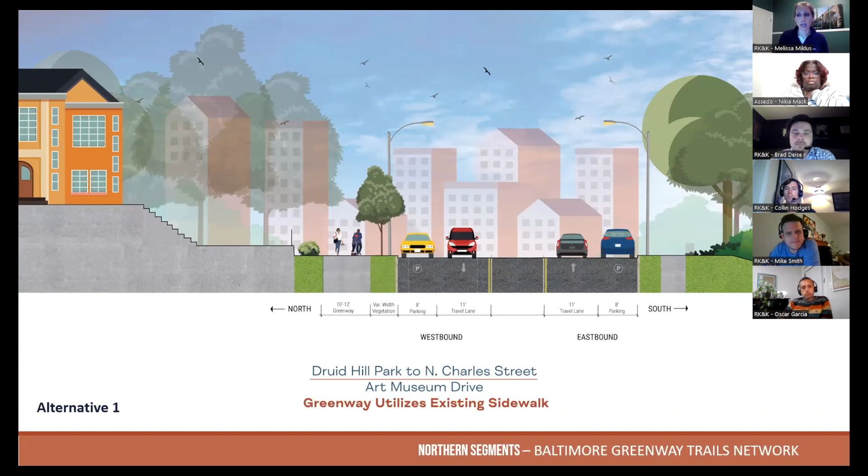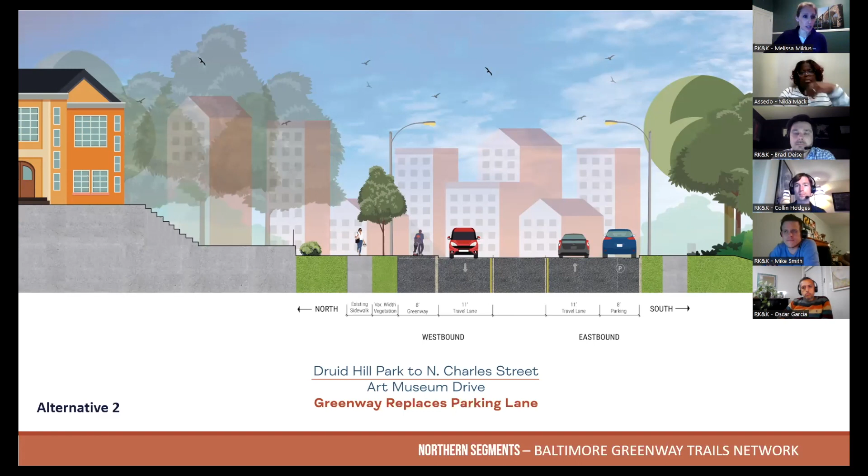One of our options is to utilize that existing sidewalk space, expand it where we can, and use that as our Greenway Trail, but the roadway remains the same. That is option one. Our second option is to take some space from the roadway, perhaps that parking lane adjacent to the museum side, on the north side of the street, pull that up to sidewalk level and create a greenway in that space. That may have some narrowing of those lanes. I heard someone say that perhaps that buffer could be narrowed as well, so that's a great option for us to take a look at. That's option two.

So let's take the temperature of tonight. What do we think about using the existing sidewalk space, potentially expanding on it a little bit, or using some space from the roadway and carving out new space for that trail and bringing it up to sidewalk level?

All right, so looks like we are a little bit over 70% for sidewalk Greenway North, which uses some of that roadway space, and about 26% looking at utilization of the existing sidewalk. Creeping up a little on the percentages for you guys on the phone - about 78% are looking at using some of that roadway space to create new Greenway Trail, and 21% looking at the existing sidewalk.

That is great input. Thank you all. I think if there are no final thoughts, Matt, from you, I think we're ready to close out this meeting and talk about next steps.